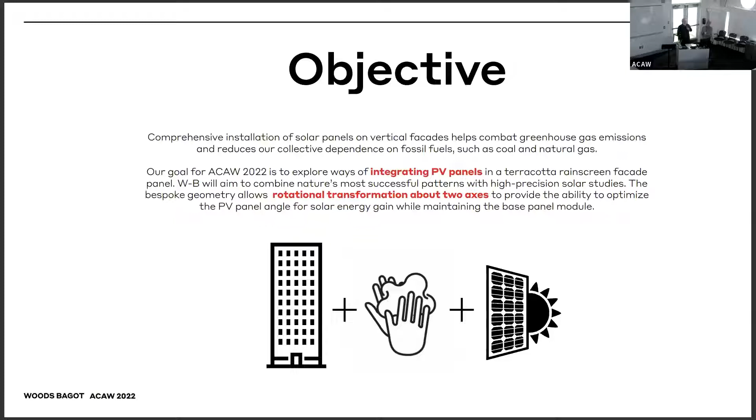So our objective, similar to the first group, was to find a way to integrate PV panels into a rain screen facade system that could provide flexibility to be adapted to various building designs with different aesthetic outcomes, and also to be able to optimize for a building's location and orientation and provide the best possible outcome for the performance of the photovoltaics.

So in our initial research, we started looking at other applications of photovoltaic integration in building facades, and we just maybe weren't very happy with the visual appearance of it. The lack of integration, and also sometimes when integrated into glazing, some of the impacts it has on the visual of the glass. Using terracotta, we thought there was an opportunity to provide more richness than what we've seen, and a better visual outcome and integration into the building.

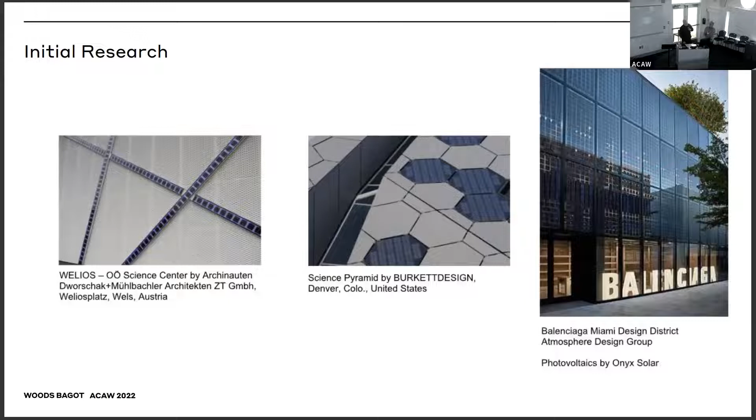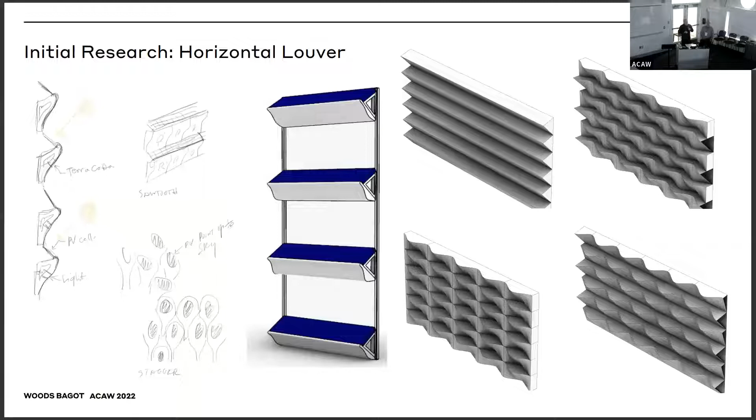So we started by looking at a couple of different ideas. The first was looking at this idea of the horizontal louver, where essentially you would use the terracotta panel on the underside so that when you look up the building, you primarily see terracotta, but then the top of the louver would be the photovoltaic that would be properly oriented for the solar orientation of the building. So that was kind of exciting to us.

And we got interested in this idea initially of using wire cut panels so that we could improve the efficiency of the terracotta, using a simple, straightforward extruded process, slicing it and using the texture that would be revealed to create some different aesthetic outcomes. We thought we could use it in a wall application and a louver application. There were a lot of different ideas we had at that point.

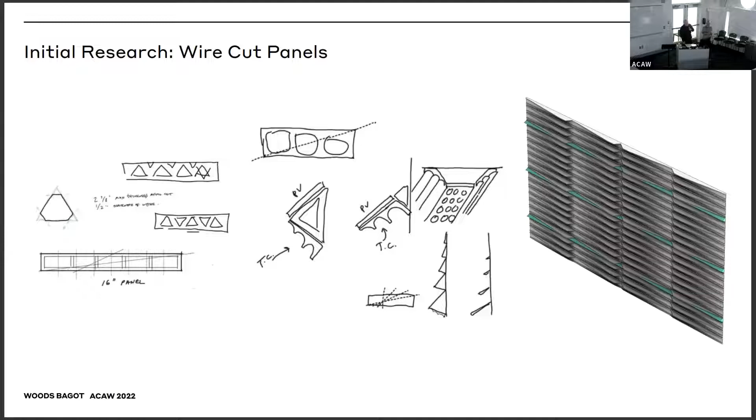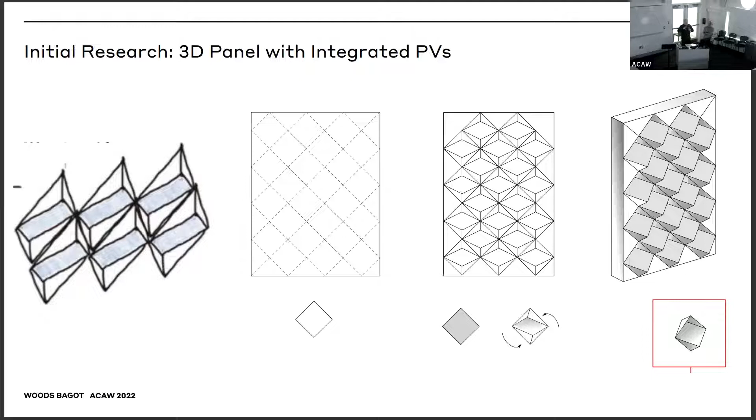But we ended up studying this idea of integrating it into more of a three-dimensional panel, where it's essentially a tessellated facade system where the photovoltaic would be rotated and oriented properly towards its orientation, and the terracotta would be the element that would bring it back to the facade. So if we kept the building facade planar, the translation to the photovoltaic became the design opportunity with the terracotta.

So one of the things that we liked about this was the idea that using this tessellated system, you could come up with a lot of different patterns and approaches. So anything from purely orthogonal to these more skewed rhombus shapes that we explored in diamond shapes. So we thought there was a lot of design flexibility, that it could be applied across a lot of different building designs.

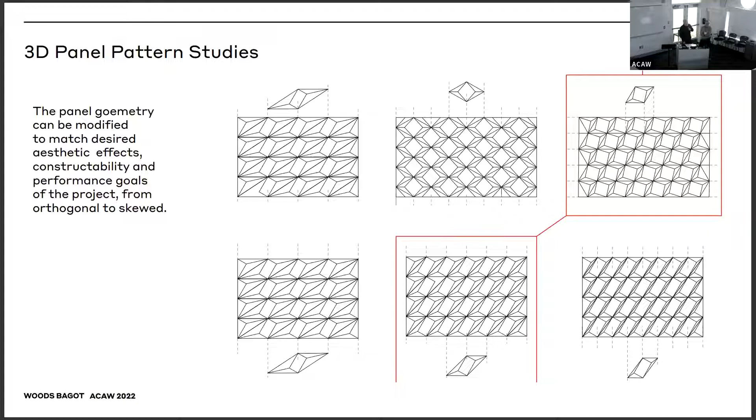There's just some further study of this in model form, where we were looking first at just the pattern, but also how this folding technique can be applied to more organic building shapes, and could be very versatile in its application.

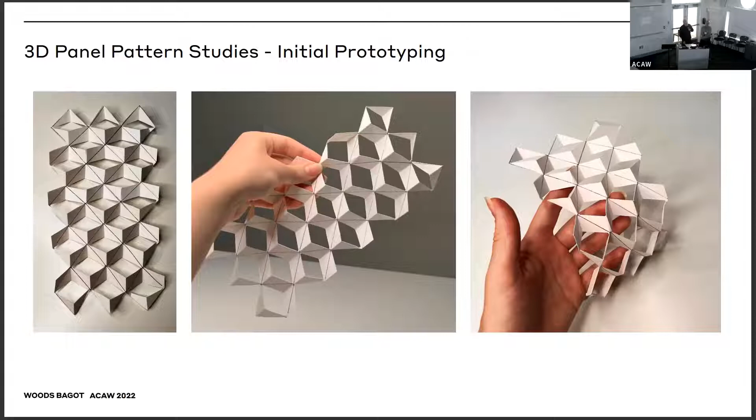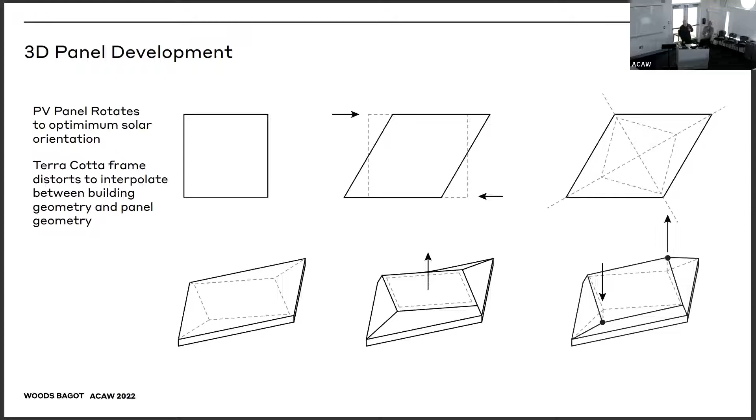As we further developed the 3D panels, this idea that if you start with the quadrilateral outline, keeping it planar, rotating the PV cell to its proper orientation, then through that you start to get these ruled surface geometries of the terracotta that become exciting things to create more depth and shadow in the facade, create opportunities, similar to the first group, to almost have a self-reflection back onto the PV panel and increase its performance, and a lot of different opportunities for different surface treatments and colors in the terracotta panel. So this was the final form that we developed further for the mock-up.

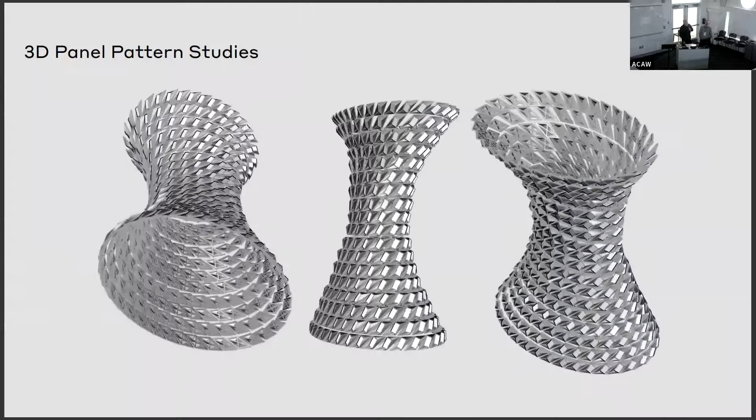And again, just this idea that it could be applied not only on an orthogonal building, but across more three-dimensional forms, using obviously CNC fabrication techniques to create more versatility in the prototyping.

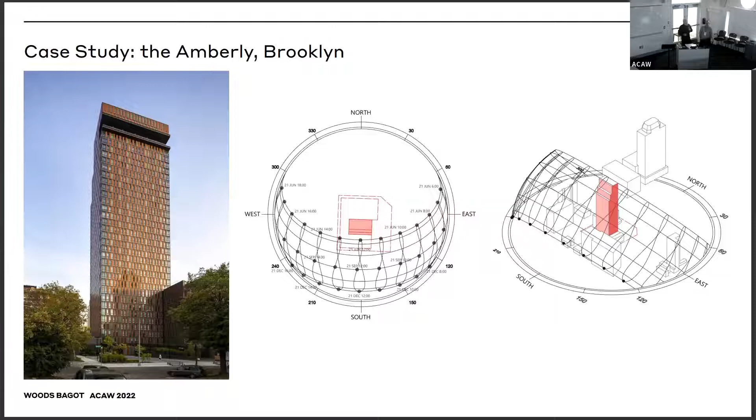So we did a case study. We took one of our projects, which is the Amberly in Brooklyn, and it actually was originally designed to be terracotta as well, to integrate it into the vernacular architecture of Brooklyn. And we started to think about, what if we reimagine this as this integrated photovoltaic skin that will start to get a bit more depth and texture than, let's say, the existing building.

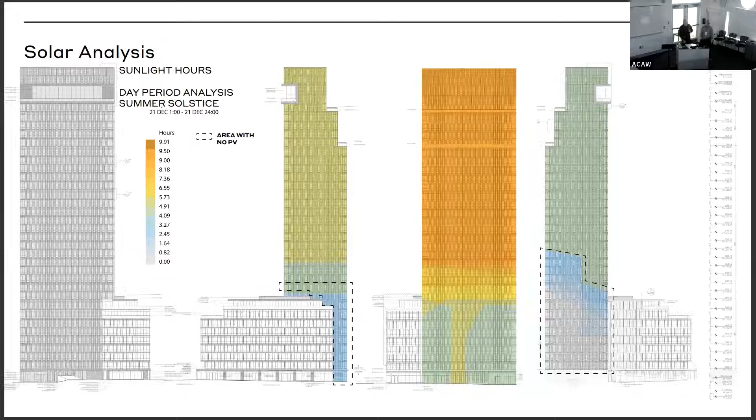So we started off by looking at the solar analysis, using similar tools, I think Ladybug and Radiance, to understand the performance of the facade. South facing being here, the one that's the most orange, as you can imagine. East and west having a little bit less light, and the north at this particular moment not getting any. But the idea that we could craft the facades differently to angle more towards the sun would also give the building a different reading as you start to move around it.

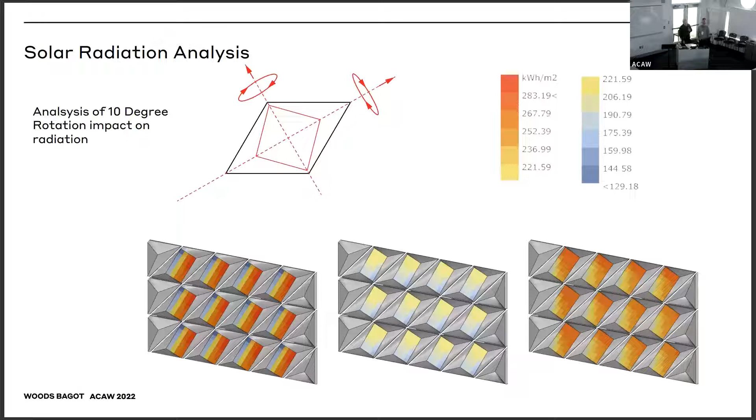We started to look at the different orientations and the impact they would have on the solar radiation. So here you see three different rotations of the panels and how much radiation they're getting. So we used that to help optimize it for the facade application. And then finally, we compared it to what would happen if we just did a more normative vertical flat panel of photovoltaic.

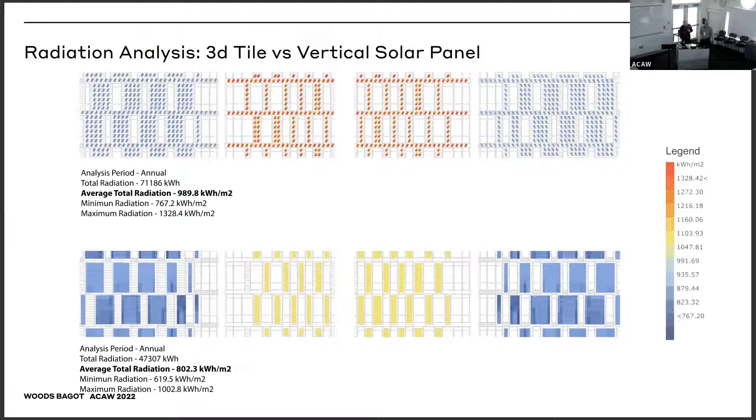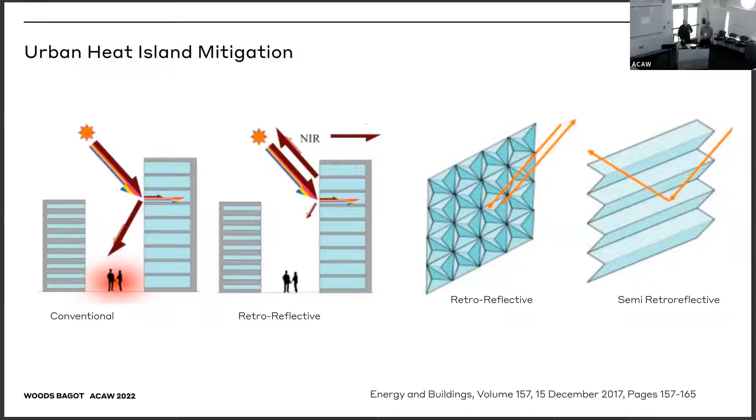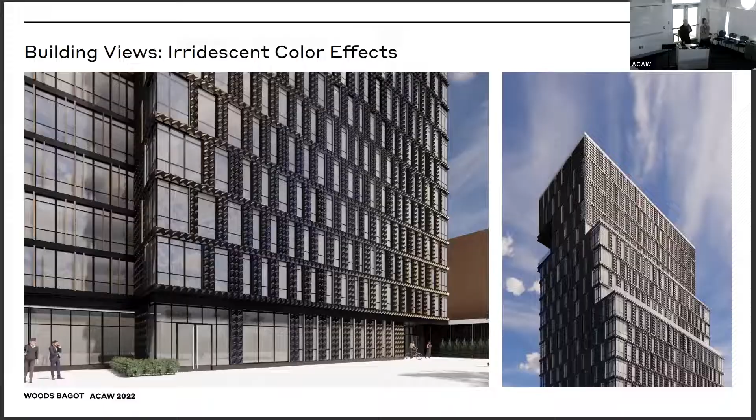So I'll move into the mock-up now. Sure. So I'm gonna hand over to Josh for this.

Sure. So we did not get the chance to delve as deeply as our friends at BKSK did on the PV panel, so we ended up with our faux PV panel. But ultimately we worked with the surface texture on the terracotta panel to try and highlight the geometry shifts. And as we were talking to some of the students from NC State earlier today, they brought up the idea that it could also be used to further reflect the light on the PV panel, similar to the BKSK scheme, which we thought was pretty compelling as well.

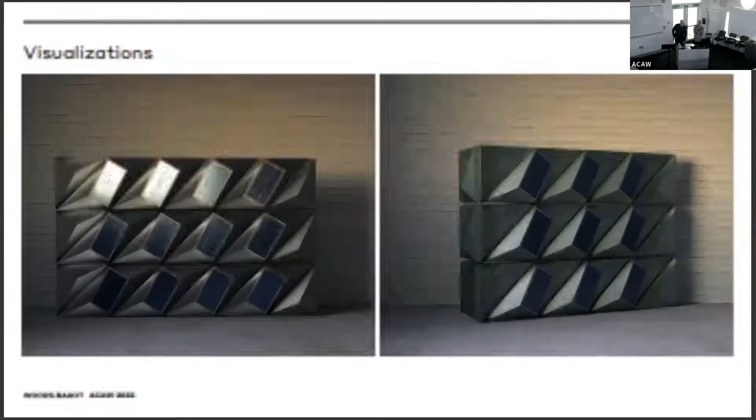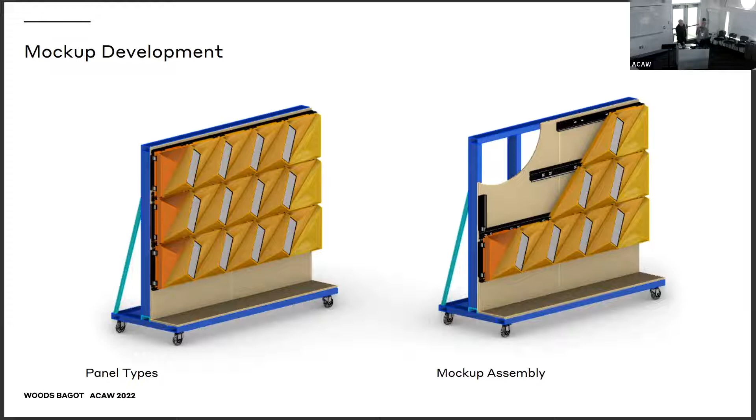And these are just some early renderings that we did as part of the process. And mock-up. Oh yeah, one part that we didn't ultimately get to install was the corner panel, just due to fabrication and time. But the idea, generally speaking, is that it's a solid panel without the PV that then gets cleaved and can fill in the corners and turn corners.

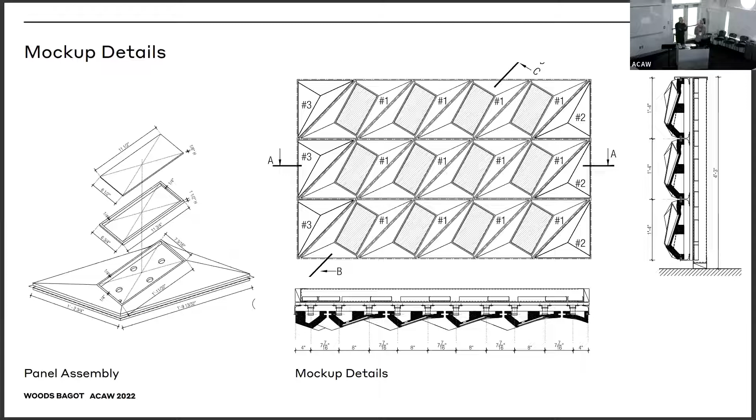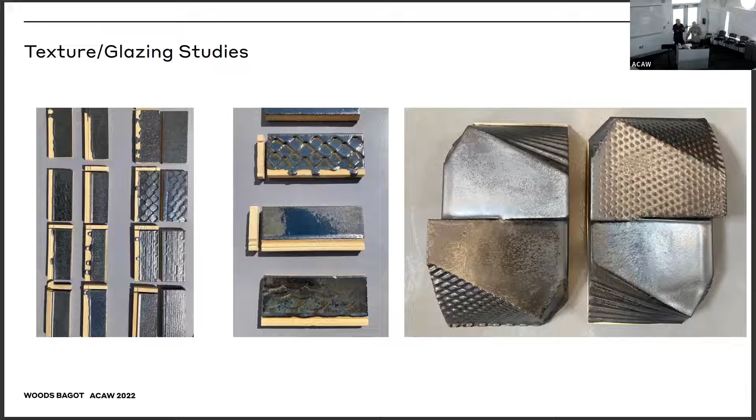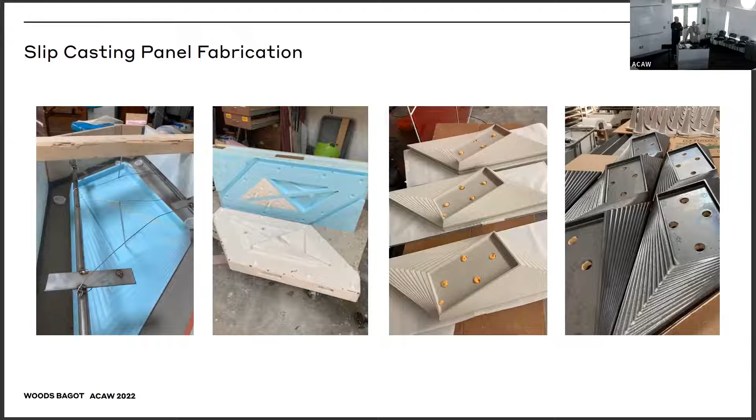And then we've just got some more technical drawings of the system and some glaze studies, which we had a lot of fun working on with Andy and Andrew from Boston Valley. And it's kind of funny that we somehow ended up with a very similar glaze technique to what BKSK did as well. And these are just some process images from while Andy was putting the panels together. And this is some process photos from the week. I think this is it.